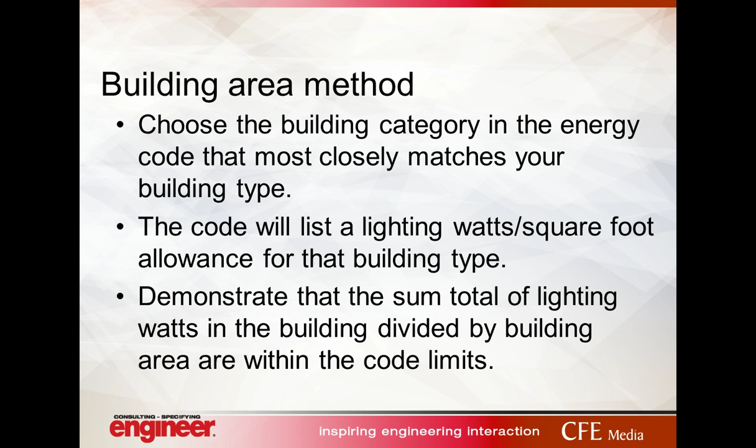So the building area method, the way that works is you look in the energy code, they have a list of building categories, and you pick the one that matches your building type. So for example, if you're doing an office building, you would choose the office category. Corresponding to that, they list a lighting watts per square foot assigned to that type of building. And you basically just have to show that if you add up all the lighting watts in your building divided by the area, the actual lighting watts per square foot of your building have to be less than what's allowed at the building level. So you are looking at it at the building level, not at a more minute level of detail.

So the advantage of this method of calculation is it's very, very easy to do. Really all you need are the total lighting watts for the building and the total square footage for the building, and that's it. It's very quick to do. It's also nice because if things get updated inside the building, like spaces get bigger or smaller, they get added, deleted, you don't have to worry about that. It's just the sum total of the square footage and the sum total of the watts that you need to worry about.

On the downside of this, it is less flexible. It does not really allow you to take special allowances for more unique lighting applications. So say if you had a school building, you're using the school category, but it has a TV studio inside. This doesn't allow you to kind of account for more unique uses in the building.

So then we get to the space-by-space method, and in this, you actually look at each space individually in the building, and you pick the category that matches that space. So they have, on a separate table completely, a lighting watts per square foot allowance for each specific space type. So things like private offices, open offices, corridors, all the different types of spaces you might find.

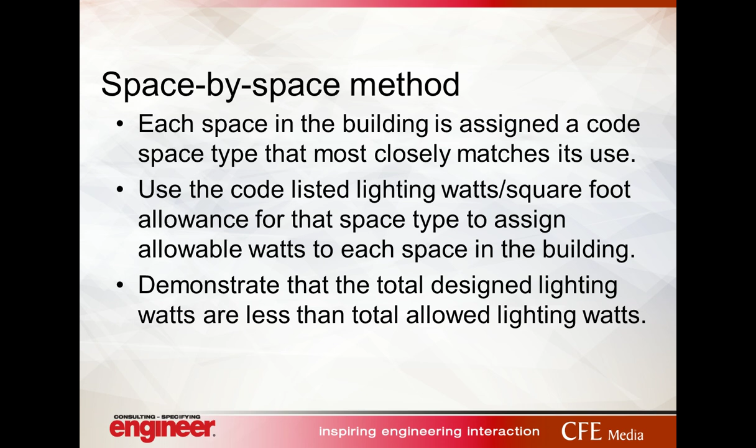And you use those individual spaces and the area for each space to come up with an allowance based on each space's individual allowance. You come up with a total lighting watts for the building using that approach, and then make sure that your total lighting that you're designing uses less energy than that. And I will go through an example which I think will make it a little clearer.

So the space-by-space method, the advantage is that if you have one space that uses less watts than it's officially allowed to, so say the allowance is 200 watts and you're using 150 watts, you could have another space that is maybe using 50 watts more. As long as it all balances out at the bottom of the summation of watts, you're allowed to do that. So it's a way of almost borrowing extra surplus watts from one space and using them for another space.

They also have additional allowances for specialty lighting such as retail, decorative lighting. They have a whole list of scenarios where you're allowed to use some additional watts that you wouldn't be able to do in the building method. The downside is it's very labor intensive. You have to constantly maintain a list of every space in the building, what the area is of that space, and what the code assigned category is for that space.

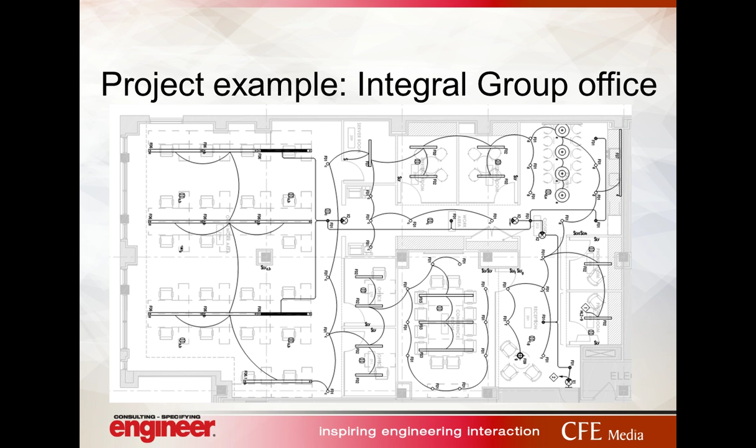So I will say for the example I'm doing, I picked the smallest example I could come up with to minimize the legwork, and that is actually our own office here in Washington, D.C. that we recently moved into. So I'm going to go through an example of both methods of calculation using our office as that example. So it's a relatively small office. It consists of open office, private offices, a number of meeting rooms, reception, and a pantry. So pretty much the spaces you would find in a typical office.

The lighting we have is a variety of lighting types. We have some functional lighting like downlights and linear pendants. We also have some decorative lighting like an LED strip and a cove that lights a tile wall that we have, as well as a decorative pendant in our reception area. So we have a variety of lighting types.

So if we use the building area method, and for this project we're getting LEED certification, and the version of LEED we're using references ASHRAE 90.1 2010. So this calculation was done to show per ASHRAE what our energy savings is.

It's worth noting the newest version of LEED that has come out, LEED 4.1, which is just being rolled out, they have finally adopted a more recent version of ASHRAE 90.1. They're now using the 2016 version, which I think makes a lot of sense. In the past, LEED had gotten to the point where it was actually using an older version of the energy code than most jurisdictions. But for our purposes, we're using the 2010 version.

So using the building area method, we looked up for an office building, what does it allow you to use? The allowance is 0.9 watts per square foot. Our office is just under 3,000 square feet, so that multiplies out 0.9 times 2890, gives us an allowance of about 2,600 watts to use in our space. When we add up the actual watts of our design lighting, we come up with 1,693. So that gives us a reduction of 35% over what the ASHRAE allowance is.

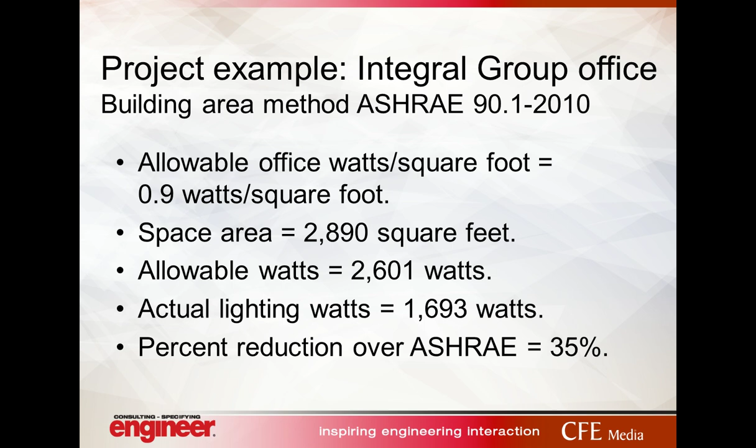And you'll see, especially for LEED for interiors, you'll get different amounts of points depending on how much of a reduction you're seeing over the ASHRAE allowance. So that's building area method. Pretty quick, not a lot of math involved. The space-by-space method is more labor intensive.

So what I did and what you need to do for this approach is list each space in your building. So that's the left column there. The area of each space. And then I had to assign an ASHRAE 90.1 space type that corresponds to it. And there's some judgment calls, like our server room, they don't have a server room category, so I decided the electrical mechanical category is the most similar. So there are some judgment calls.

If you look in that middle column, the ASHRAE 90.1 allowable watts per square foot for the space, you'll see a lot of these values are actually over 0.9 watts per square foot. So remember, the building area method, the blanket allowance was 0.9 watts per square foot.

You're seeing here that a lot of the spaces, if you're individually looking at them, have a space allowance that's a higher number. What this means is if you have an office project that maybe has a whole lot of meeting rooms and a whole lot of private offices or enclosed offices, this may be worth doing because it's going to give you a higher allowance.

You'll also see that we designate some lighting as being decorative. So there's a column there for whether there's decorative lighting or not, which is what we're kind of circling here. Space by space actually allows you to take an extra allowance for decorative lighting. So in our lobby, we have a pendant. That's decorative, so it gets counted separately and doesn't count against our basic allowance. Dining area, we have an LED cove, same thing. So that's another advantage of this approach.

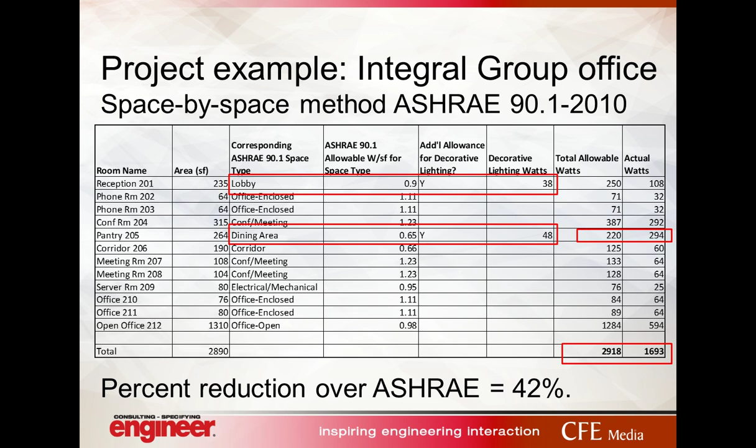You'll also see the pantry area, it's allowed to use 220 watts. It's actually using 294 watts. However, that is okay because our totals at the bottom are within what the allowance is. So with this method of calculation for the same lighting, this is showing a reduction of 42% over ASHRAE. So if I was trying to get as many LEED points as I wanted to get, this actually would be a better way of doing it because it's showing a greater savings. However, as you can see, it is a lot more labor intensive, especially for a large building.

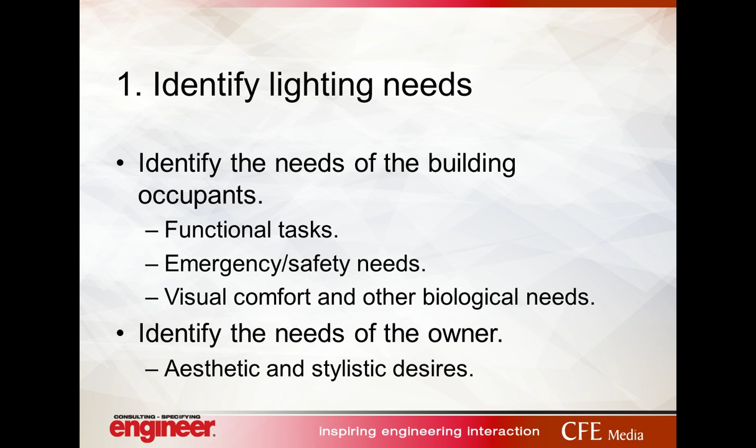So in addition to functional needs to do their jobs or to effectively use the space, we also have to consider those base needs from an emergency standpoint that we just talked about. And then we can also take it a step further and think about the visual comfort of the occupants and their biological needs in those functional requirements. And finally, past the function piece, the owner or the client may have some aesthetic and stylistic desires that aren't necessarily functional tasks, but are certainly something we want to consider when we're thinking about the holistic design of a building.

So once we have those needs identified, and we can use our recommended practices to start to identify what approaches would be good, we need to start thinking about the different layers for those needs. So the task layer is the first one that we consider, and that's usually talking about what you absolutely need to see. So working and interacting surfaces, the places where you need to actually read a newspaper, sign a form, small critical tasks versus larger tasks, like being able to see a face and recognize it across a larger space. Certainly wayfinding, being able to navigate the space, but especially in the egress situation where we need to also understand the exits of a space, and related to that, of course, walking surfaces and things like that. So all of those are different tasks visually that we need to see.

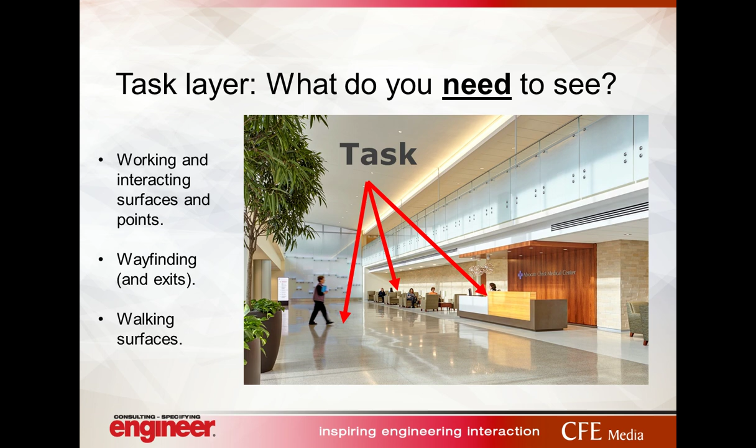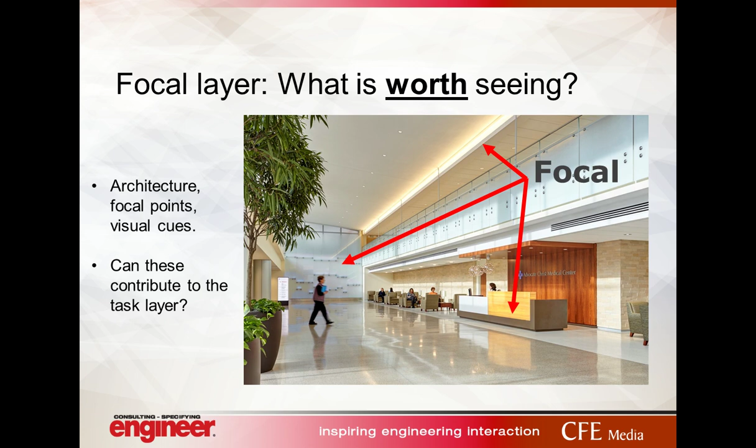Then we move on to, well, what's worth seeing? What are the things that we want to see? And this may play into the stylistic goals. What are the focal points? What in the architecture is worth seeing? What do we want to highlight as a visual cue? And then we think about if any of those focal elements can actually contribute to the task layers we just talked about. If we're lighting a ceiling, can it also provide the general walking lighting, or do we need to have a separate layer for that? Next, we think about daylight, and that's kind of, is there daylight or isn't there?

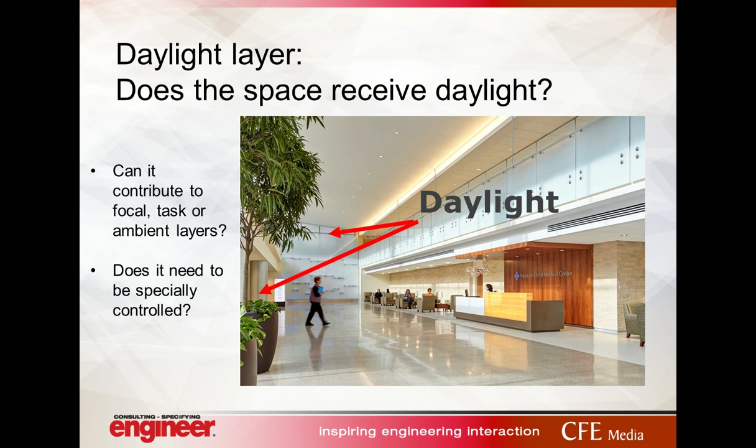If there is, we need to think about how it's going to be incorporated into the lighting design. Is it going to compete with things? Do we need to control it? Is it going to be visually obtrusive? Can we actually use that and harness the daylight to do, again, some of those base tasks, being able to read, being able to see general things? Maybe not use that for the smallest focused task, but maybe we could use it for walking and other things, and can we save energy that way?

Next, we talk about decorative lighting. Would the space benefit from decorative lighting? Is it needed for the owner's sort of stylistic idea of what the space can look like? And again, can it contribute to some of those other layers so we're not double dipping?

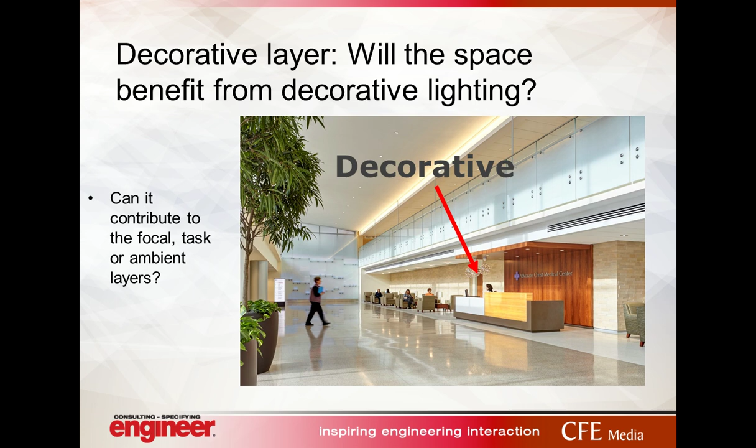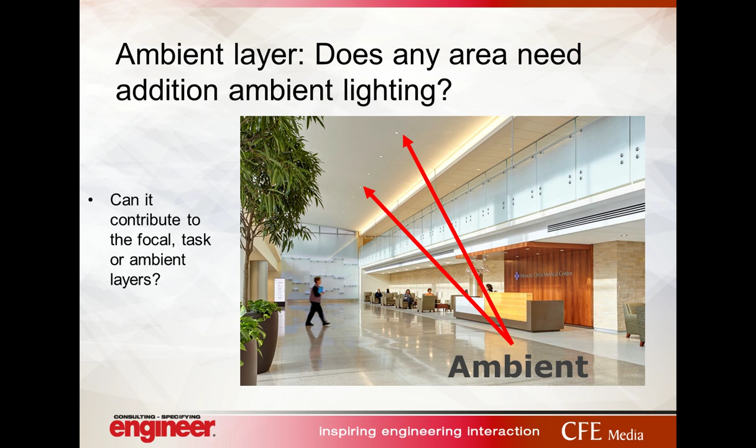And then lastly, we kind of fill in any of the gaps that are needed from an ambient standpoint. I'm going to talk about contrast ratios a little bit later in the presentation, but making sure that we don't have any excessively dark spots, that the visual composition is feeling balanced. And I usually do this last to make sure that we're not starting with an ambient layer and then layering on top of that, and in some cases overlighting the space. I do it last to make sure that if there are any gaps, we fill those in.

And I just add this at the bottom, that those are the different layers, and then we always need to be checking against the lighting power density budget that Sarah just explained. We don't want to overlight the spaces for the sake of overlighting them, which is why we keep checking back that these layers can contribute to that original task layer or the other layers that we're considering in our composition.

Right? So once we've got our layers, we need to think about how we're going to control them. And usually it's a different strategy for different types of layers. Some may require a lot of flexibility for users. Some may be perfectly happy being automated based on time of day or whether or not sensors detect presence of people. So we usually need to think about what needs to happen from a manual standpoint. Then we think about what's required from a code requirement and an energy saving standpoint. And then I usually say whatever else can be automated after that is usually a good way to finish out that kind of consideration.

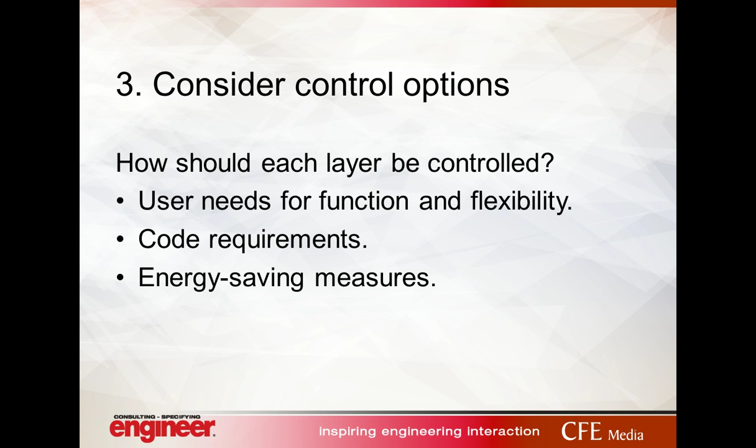And lastly, our fourth step is once the system is designed, how is the system going to be used in the future, and how are we going to maintain it so it continues to be effective in terms of the steps that we just walked through. So we certainly need to consider the overall energy consumption and the life cycle of the system, and then those maintainable pieces. Training is usually a good place to start, especially as our control systems get a little more advanced. And other future-proofing measures that we can build into our designs, high life of LED sources, that L70, or we're even seeing L80 or L90 from a life standpoint.

High-end trimming and task tuning are options that you have to sort of over-design the system on day one, dim the lights down to a little bit of a more acceptable level, and then extend the life of the system by ramping that back up as the L70 sort of depreciates over time.

Specifying common driver types is another way to future-proof your system. Working with your manufacturers to try to use the same types of drivers so you only have to stock one. Most of us know that the driver is the first thing to go in an LED system typically. So considering common driver types is something that we can do to combat headaches down the road. And also having some attic stock of those drivers and typical LED modules, if you have them, is a good idea.

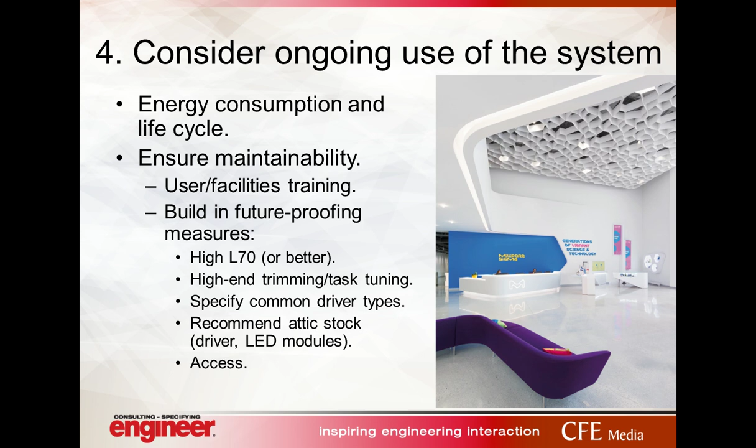So I'm going to flip it back over to Sarah to talk a little bit about controls.

Thank you, Sarah. So this presentation, it's not focused on controls, but controls obviously are a really inherent part of lighting systems now. So I'm still going to just touch on some of these strategies a little bit. However, if you do want to get more in-depth information, I was part of a control-focused webcast last year that we'll have a link to in this presentation, and there's some additional links and resources there for more in-depth coverage of that topic.

I think the thing to kind of look at with controls and energy codes, so the energy code has a watts per square foot allowance for different space types in buildings. And what that allowance is, it's calculated as if you have all the lights on at 100%. So if you turn all the lights on, full output, that is the watts per square foot that is used to show energy compliance. So that's kind of the first level of coverage and requirements that the code has. On top of that, the code has lighting control requirements, which are then applied to that lighting that you've designed.

And while a lot of times I think we look at energy efficient projects as saying like, oh wow, look how low the watts per square foot are, really energy consumption is kilowatt hours, which is using power over an amount of time. So watts per square foot does not really tell the story of how much energy a space or a building is using. So it's something to keep in mind. Watts per square foot, it's a very straightforward metric to show how potentially efficient a lighting system is, but the real story is in how much that system's actually on and operating.

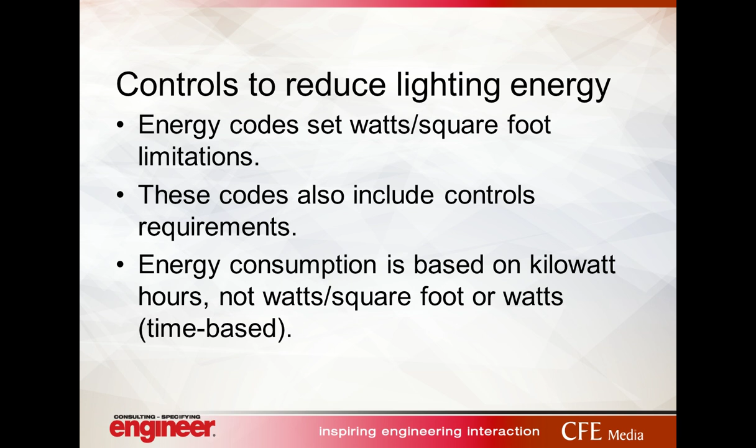So when you think about controls and how it impacts energy, the benefit of controls is it limits how many hours per day you're using the lighting through vacancy sensors, and it reduces the output of your lighting fixtures through either manual dimming or photosensor dimming. So you could have a very efficient, low watts per square foot, say you have a 0.5 watts per square foot office, but the lights are on at 100% for 12 hours a day.

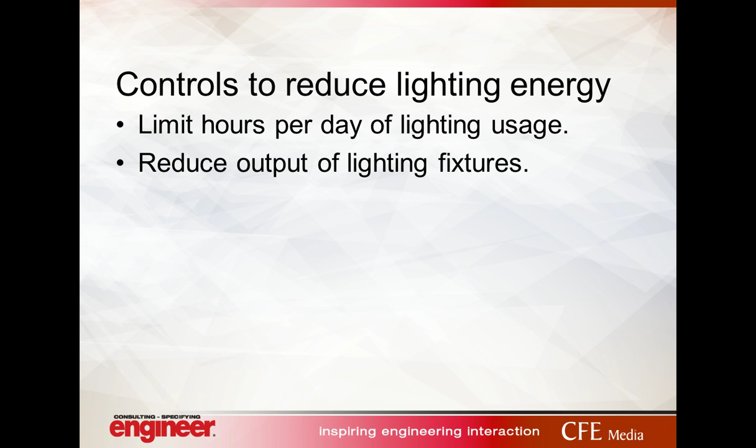Contrast that with a space that is maybe using 0.8 watts per square foot, so it's using a higher watts per square foot. However, in that system, the lights are dimmed down most of the time and are turned off for half the day. Really, even though that one system has a higher lighting watts per square foot, it actually can be using less energy if the controls are applied correctly. So it's something just to keep in mind. While we look at watts per square foot, the real story is in the kilowatt hours, and that's where controls come in to really try to reduce the actual power consumption.

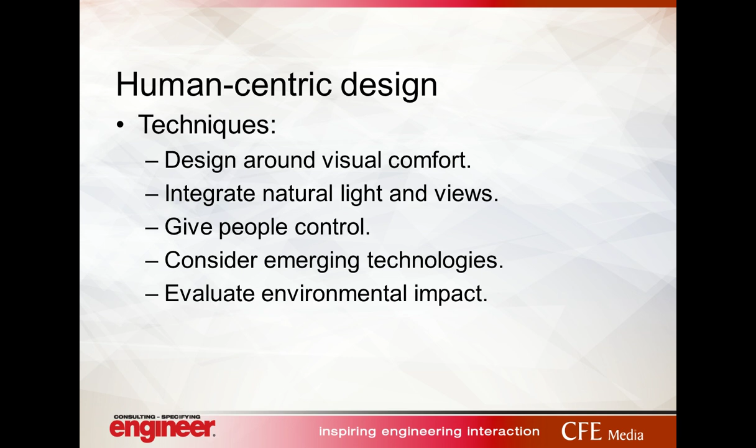So we're going to talk a little bit about these sort of approaches, and really what it boils down to is this idea that holistic systems balance out the different needs of a design, and it doesn't just sacrifice visual comfort for efficiency or other sort of triggers. It looks at things in a more holistic way. So there's many techniques that you can use to sort of advance this idea of designing around people, and here are a few of them we're going to talk about.

The first one is about visual comfort. Visual comfort is something that, again, as LEDs are sort of taking over the lighting world, a very powerful, very efficient source, but also can be extremely bright if it's not controlled correctly. So that translates into our design process, again, to that idea of contrast ratios. 10 to 1 in terms of brightness when you're doing illuminance calculations or luminance calculations is kind of the threshold for comfort. When you're over 10 to 1, you're visualizing that intense brightness, and it can lead to things like migraines and headaches.

3 to 1, 2 to 1 is sort of the threshold of being able to really see a differentiation between things. So if you're trying to make things pop, you need to be looking at 3 to 1 to 5 to 1, but you really do want to stay under 10 to 1 for general lighting and for most applications that we deal with every day.

Another thing to consider is capping lumen output. Just because we can pump out 3,000 lumens in a downlight doesn't mean we necessarily should. And so another good rule of thumb for linear fixtures is to use something around 500 lumens a foot. Anything more than that can be too bright in the field of view for an extended time. And that's, of course, for typical applications, maybe an 8 to 10 foot ceiling height. 500 lumens a foot is appropriate.

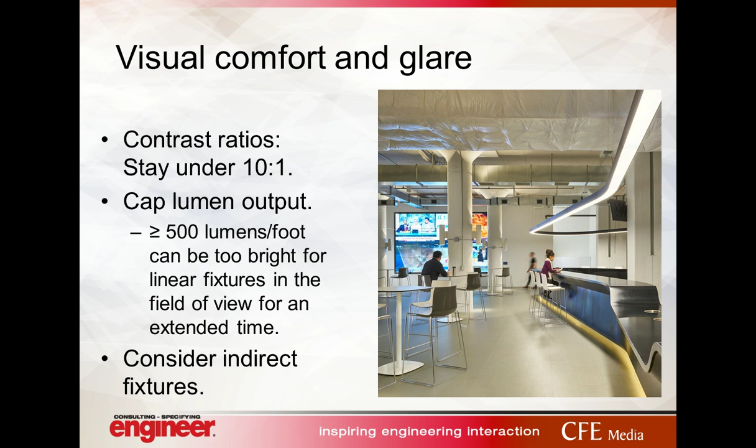When you start going to higher ceiling heights, it may be okay to go up to 750 or 1,000 in some of those higher packages, but generally speaking, 500 is a good place to be. And another thing, of course, to do is to consider indirect fixtures. When you don't have the opportunity to look into the source, you're certainly going to reduce your opportunity for visual discomfort.

Two more quick things. Smaller apertures definitely increase the perception of glare. So 1,000 lumens out of a 6-inch downlight is going to feel less bright than 1,000 lumens out of a 2-inch downlight. So we need to be thinking about the appropriateness of the scale. Just because, again, we can do a very small aperture doesn't always mean that we should. And so there's a balance there.

Another good rule of thumb is to look for downlights when you're specifying for 45 to 55 degrees cutoff, which has a deeper cone, rather than those very popular, very inexpensive surface-mounted sort of downlights that are edge-lit and you have all the brightness right at the bottom of the fixture. They cost a little more. We talk a little bit about high-quality specification grade. They do cost a little more, but that visual comfort is very important for people over time.

I'll just point out, if you've ever heard that 3-30-300 rule that is very popular to discuss in real estate, it's kind of the scale of investment. So in terms of the pie of where owners spend their money, a very small amount is on the building and the energy, and then there's the systems and the way that it actually hits the bottom line, and then finally the 300 is the people. The vast majority of money that owners spend is on the people that they employ and the salaries and the benefits and things that go into it.

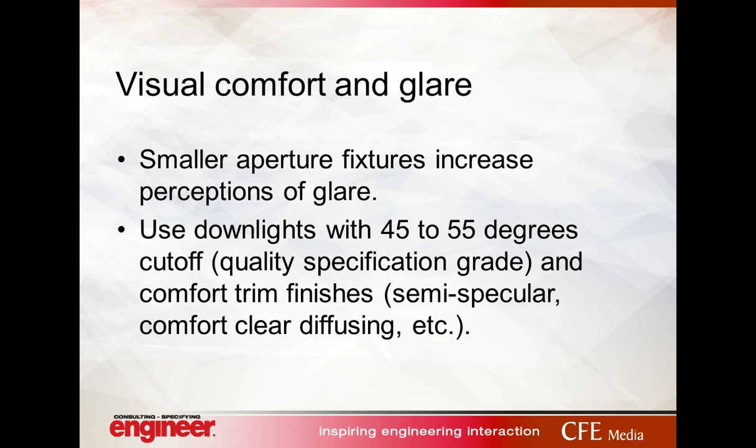So any small increase in productivity and satisfaction that's going to make people perform better actually has a huge benefit on the bottom line. So these small things like giving people comfortable work environments reduce incidences of people not coming to work and having to use PTO and benefits and other things. So this is how this all ties together.

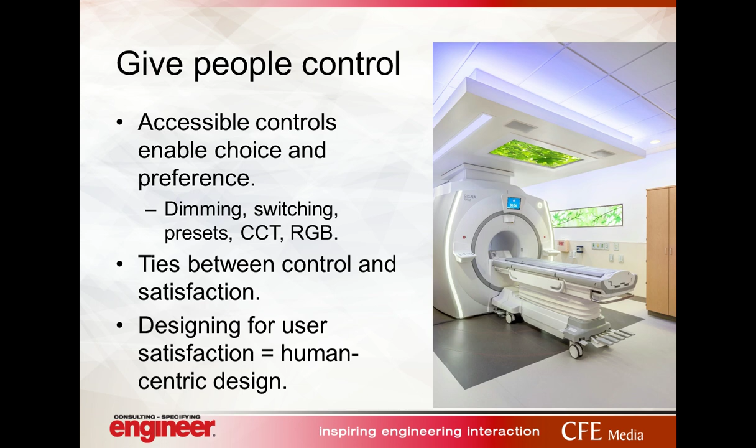Another strategy in terms of designing around people is giving people control over their environments. So using these accessible controls like dimming and switching, taking advantage of the new technologies that we have in lighting with the LED platforms of color tuning or color changing, giving people these accessible controls through apps, through manual stations, et cetera, has a corollary between people being more satisfied and, again, maybe performing a little bit better. So that idea of designing around people and satisfaction is really at the heart of human-centric design.

There's other technologies that I'm going to just briefly mention because, again, we could talk all day about what the industry is learning about these, but CCT, correlated color temperature tuning, seems to have a lot of different ways we can design for positive impact. So we know from the work that's being done by the LRC that in educational settings, there is a corollary between being able to focus and being able to change the lighting environment. Being able to change the color temperature from warm to cool seems to have anecdotal evidence saying that students are able to pay attention and task switch easier.

So learning more about that and case studies that are focused on that technology and, again, quantifying the benefits are what kind of offset some of the costs of these systems. Again, if test scores are higher, that's a good driver for employing some of these new technologies.

And then when we talk about smart systems and IoT and connecting systems for various forms of collecting data and using that information to inform the way people use spaces, that's another place that we're starting to see the industry just really burgeon with all kinds of new information. Those technologies certainly can have an impact on the way people work, and so they're another place that we could consider as we talk about holistic lighting design.